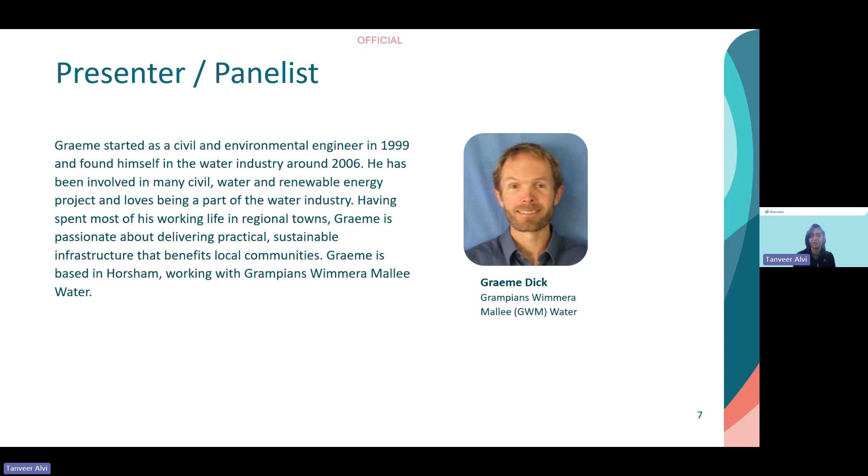We also have David Brennan from Wimmera Catchment Management Authority on the panel. He has led the organization for many years now and has been with the organization since its inception. So that's a long time. And he focuses on delivering practical outcomes that support both environmental health and regional prosperity.

The facilitator is Mika Pendergast. He's the incentives coordinator at Melbourne Water. He has been working in this industry for a long time, being with Melbourne Water since 2008, working on stormwater, sewage treatment, and water supply projects, and as IWM officer for City of Port Phillip and the Maribyrnong City Council on secondments. He specializes in stormwater management and water-sensitive urban design, and generously shares his expertise not only through industry conferences, but also by contributing to technical guidelines, for example, Melbourne Water's MUSIC guidelines. I think he's the best person to facilitate this panel here.

So thanks for joining us, all 3 of you. Now, without any further ado, we'll start with the presentation on the Horsham SmartWater Network project, and I'll hand over to Graeme now. Thanks, Tanveer. I will share my screen here.

Hopefully that's coming through. It's just not in the presentation mode. How about now? Yep, all good. Okay, cool. All right, now I'm in presentation mode. I can't see anything else, so please speak up if something's not going right.

But yeah, thanks everyone for coming. I'm just going to give a bit of a presentation on the project, which I guess is the case study for today's session. It's a bit of a mouthful, the title there, Horsham SmartWater Agriculture and Integrated Water Management Project. We refer to it as the Horsham SmartWater Project for short. And it was certainly a very collaborative effort between a number of agencies in and around Horsham, out in Western Victoria.

Thanks, Dave. Just for a bit of context around GWM Water, we're the water corporation in northwestern Victoria. We cover a large area shown on the little map there, water and wastewater services. What's a bit different from other water corporations in Victoria is that GWM Water manages water from source to tap. So we manage all the headworks, the dams in the Grampians, take some water from the Murray River as well, and groundwater, and supply and manage that all the way through to customer supply. So an end-to-end service. We don't have a lot of customers in the region, just given the dispersed nature of the population. So lots of small towns spread out over a large area.

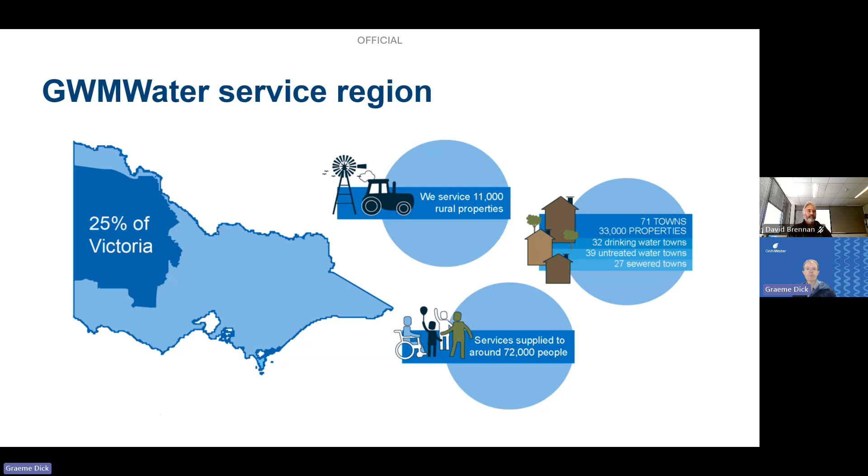So just a quick overview of the Horsham SmartWater Project. It was finished a couple of years ago. Ended up being an $11 million project, so reasonably substantial. The core aspect of it is recycled water treatment and distribution, but a strong integration with stormwater capture and reuse, which we'll go into a bit more. The nature of those different water sources and the setting of the town, Horsham, meant there was a number of agencies involved and some really strong collaboration between those agencies. Just to acknowledge, the project was funded through the National Water Grid, GWM Water, Agriculture Victoria, Horsham Rural City Council and DEECA all contributed funds to the project.

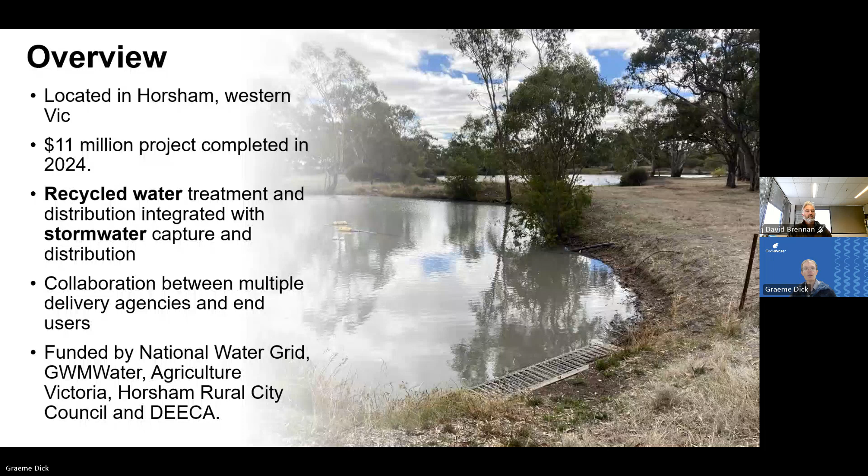Okay, so when the project started, there were a few issues going on in town. Number one, Agriculture Victoria has a research farm, the Horsham Smart Farm, just out to the west of Horsham. It's been the main user of recycled water from Horsham's Wastewater Treatment Plant for quite a long time. So the kind of cropping trials that they do there are set up around using that water. Over the years, though, they've improved their efficiency of irrigation, and especially recently, there's been a push for much greater diversification in the trials that they're doing, and looking to do more with less water. Overall, it's led to a reduction in demand for recycled water.

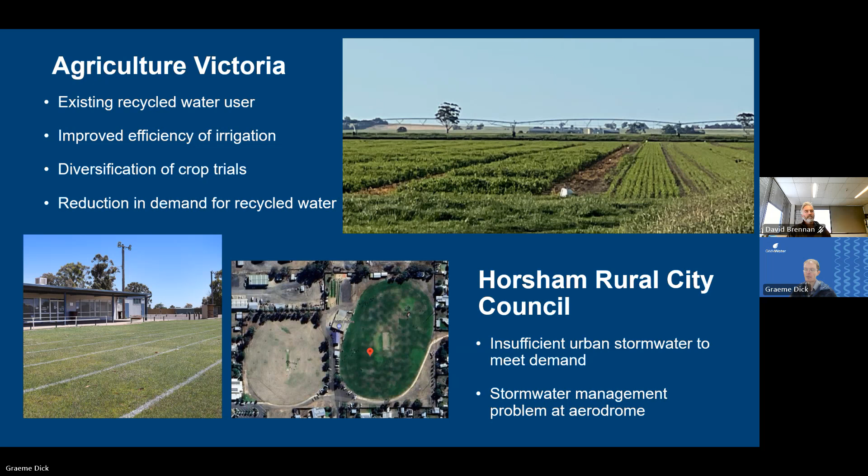Horsham Rural City Council uses stormwater that they capture around town in basins to keep parks and gardens and sports fields green. But they have an issue with that. It's quite a dry climate in Horsham, and most years they would be running out of stormwater to use on parks and gardens sometimes before summer's even halfway through, particularly before the end of summer. And using potable water as a substitute is not ideal. It's costly and not a good use of that resource. They also had a bit of a stormwater management problem out at the Horsham Aerodrome, which became part of this project, and we'll talk about that a bit later.

And for GWM Water, we had an issue linked to Agriculture Victoria taking less water for their smart farm operations. Horsham is growing slowly, and the volume of influent we get to the treatment plant is increasing. We didn't have a great breadth of ways to use that recycled water. There were flood irrigation bays on site, which were limited. Most of it went to Agriculture Victoria. And with them reducing their demands, we really were looking for something else to do with the water. And this project was about unlocking the potential of that water and getting some new end uses.

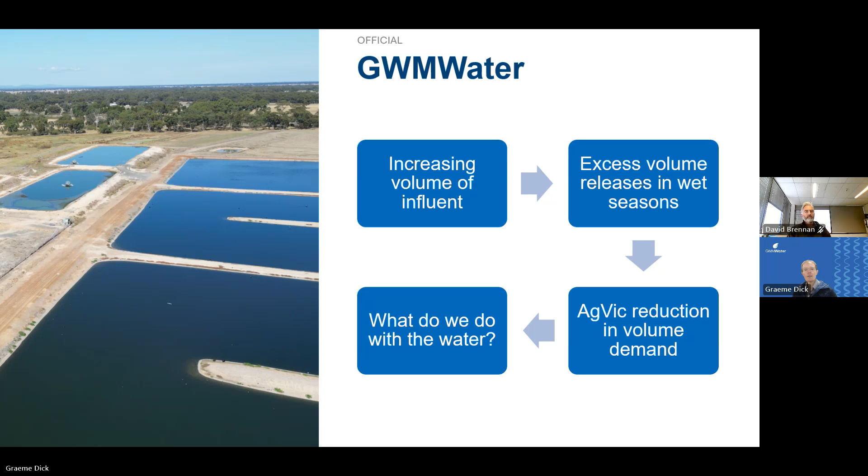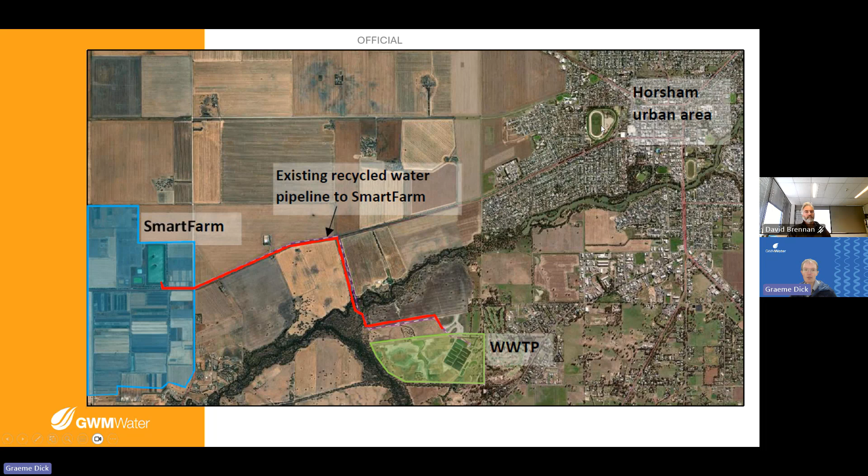So mainly at the outset, it was Agriculture Victoria and GWM Water got together talking about our recycled water agreement and their reduction in water being used and forecast further reduction. Agriculture Victoria also talked about how they'd been trying to get funding for building some better treatment infrastructure on site for that water, but hadn't been able to get that funding.

GWM, we knew we needed to do something to improve or increase the usage of that recycled water and give ourselves some more options. So we got together and put together a scope of works with the intent to try and get some funding for it, which involved GWM Water and Agriculture Victoria working together on building some infrastructure and, I guess, creating a more sustainable way of using the recycled water.

A key part of that was also involving Horsham Rural City in getting recycled water into town to the parks and gardens to supplement their irrigation so that those green spaces could be kept green year round, and be of more benefit to the town, give more options for recycled water to be used.

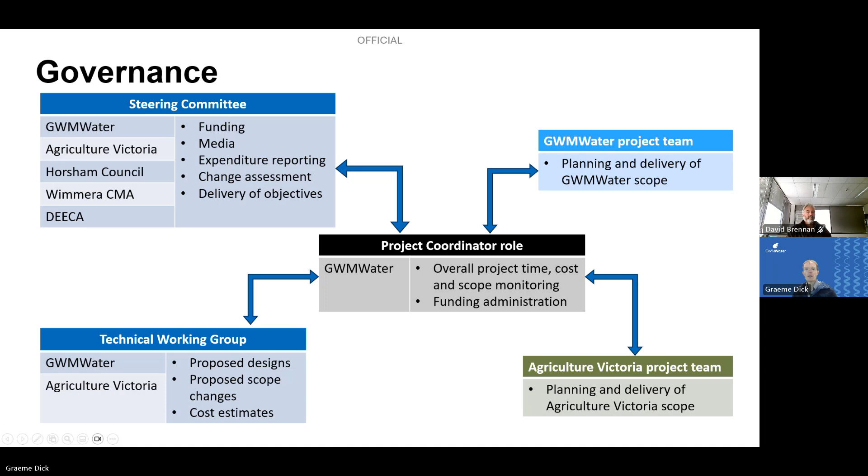And then the actual delivery of the infrastructure and the items to deliver the outcomes we wanted were done separately. So Agriculture Victoria worked on their infrastructure on the Horsham Research Farm, and GWM Water, we worked on the infrastructure for our wastewater treatment plant and the pipelines around town. We can dig more into that later when we have some more discussion.

But essentially the scope of works for the project, we had a new treatment facility to go in at the Horsham Wastewater Treatment Plant. So it's a DAF, a dissolved air flotation installation. So that was going to remove a lot of the solids from the recycled water and make it, I guess, more suitable for irrigation, particularly in mechanical irrigation systems. And we were building transfer pipelines to move the recycled water into town to use it in the green spaces in town.

Agriculture Victoria, they built a reverse osmosis plant at the Horsham Smart Farm. So it's a desalination plant essentially to reduce the salt in that water, and they actually used it to create a range of salt levels so that they could run crop trials with different salt levels. So really interesting what they're doing with that kind of shandying water to get to salt levels at their will, I guess. Yeah. And they also did a very major upgrade to their irrigation system, which was getting a bit long in the tooth.

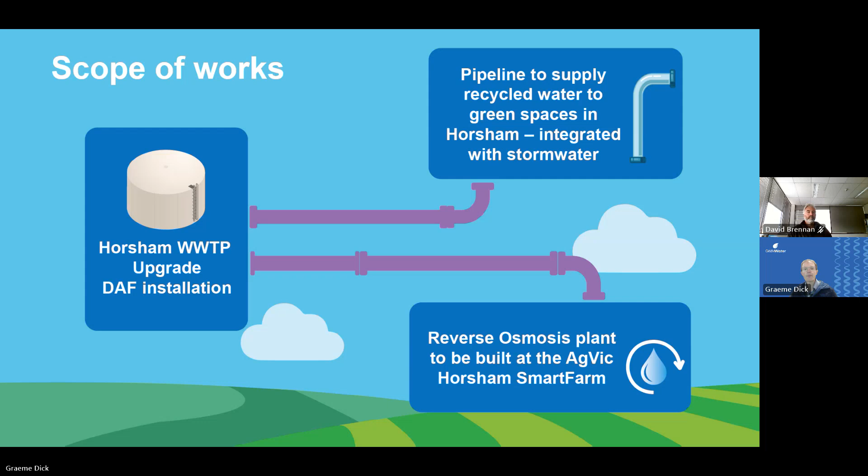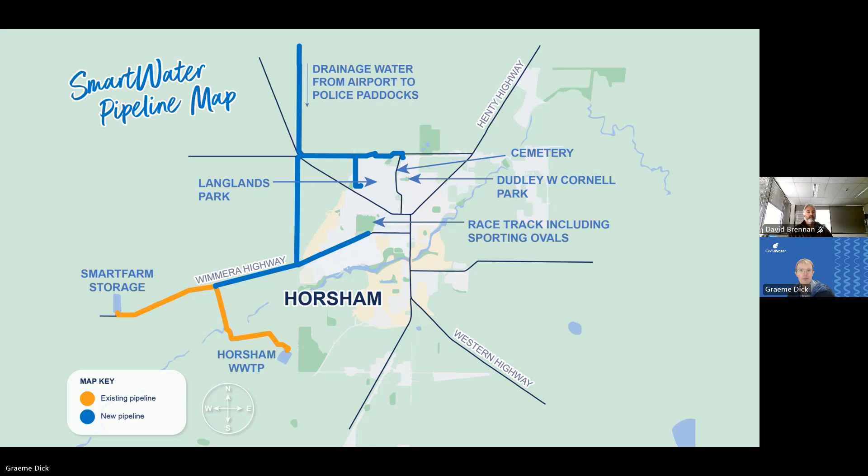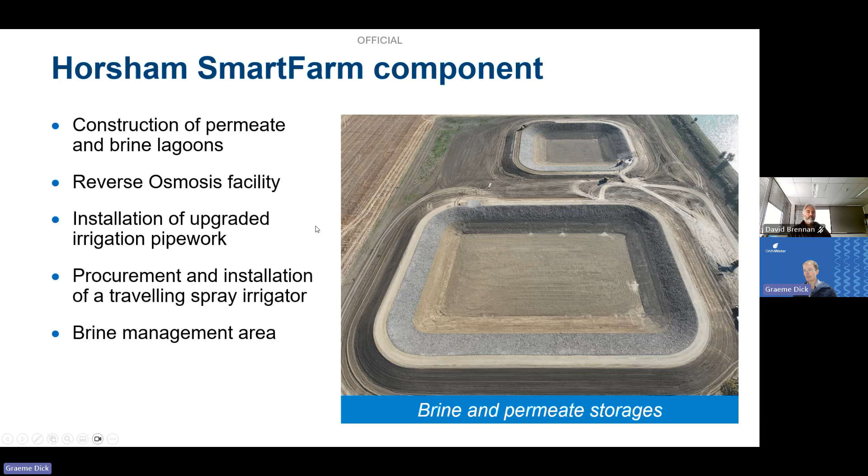A lot of work, so they replaced all of their flood irrigation system and got some new systems for travelling mechanical irrigation, and then had to do work on a brine management area. Of course, when you have reverse osmosis, you create a brine byproduct. So they had some innovative systems they used to manage that brine.

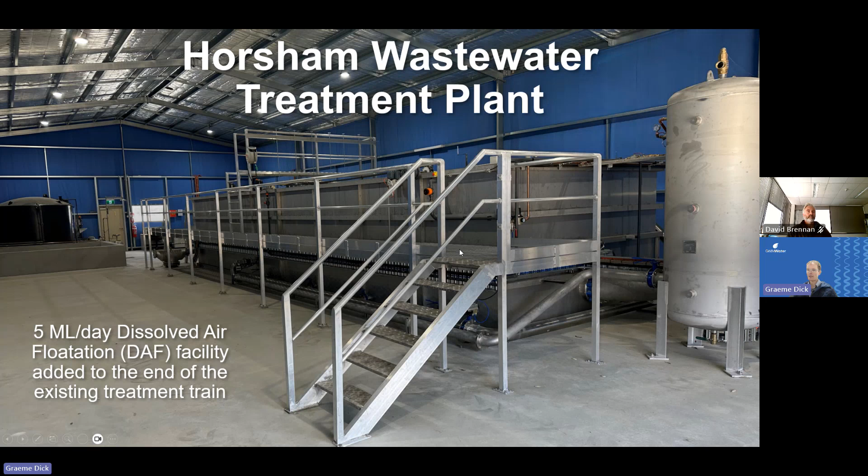At the wastewater treatment plant in Horsham, GWM Water built the new dissolved air flotation facility. So this is the tank here. In a new shed there is also provision to add a second train to that DAF to future-proof that treatment facility. It's fairly low-tech, really, a pretty resilient sort of treatment system, but it certainly removes a lot of solids from that water.

And then the pipeline, which was installed around town. By skirting around the edge of town, we were able to install most of that pipeline on roadsides in non-residential areas. All around that edge of Horsham, it's mostly cropping paddocks at the moment. And then from the edge of town, we were able to duck in along residential streets with shorter lengths of pipeline to get to that list of end users.

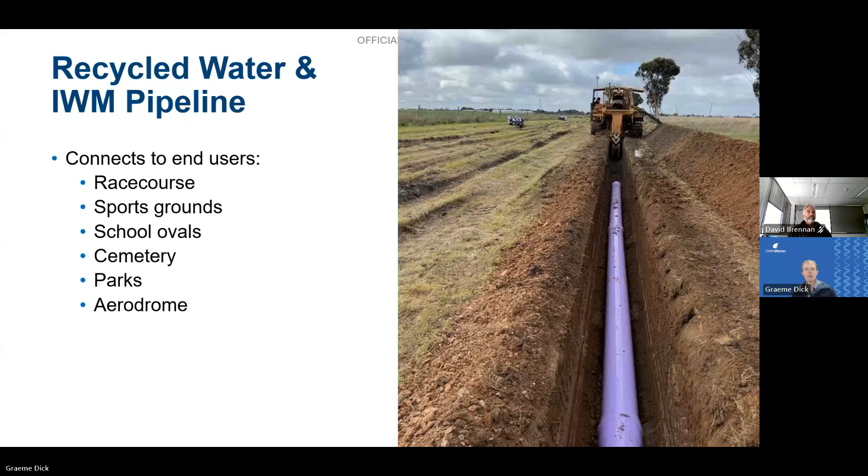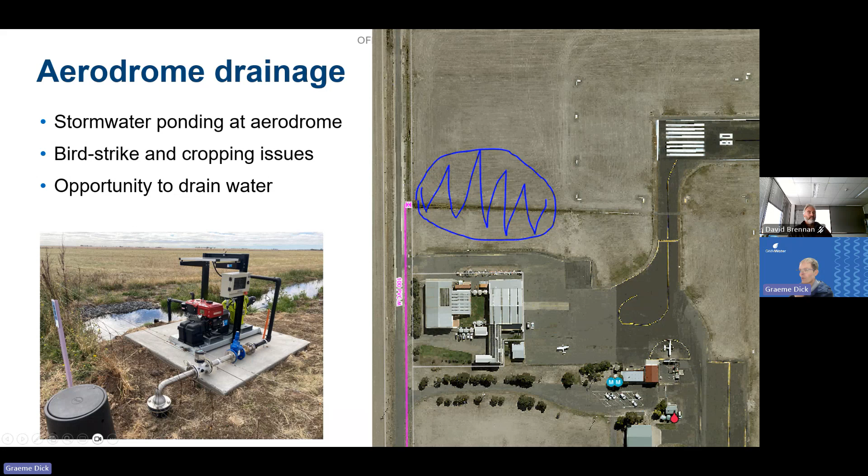What this project actually did was build a pipe out to that site and then install a sump with a pump, so that we were able to pump that water away. And we did that by using the recycled water pipeline we'd installed as a stormwater transfer pipeline as well. So we'd alternate from recycled water to stormwater using the same pipe. There's a whole process around how that gets isolated and flushed to make sure the recycled water is out before we put stormwater in, so we're not cross-contaminating.

But that was devised as an efficient way to use an existing pipe, because most of the time when we wanted to get rid of that stormwater from the aerodrome, there wasn't a call for recycled water to be used.

So over winter, when parks and gardens aren't really using recycled water very much, that's when we're most likely to have water ponding at the aerodrome, and we can use that pipeline to get rid of that water. And that water, when I say get rid of it, we move it to the stormwater detention ponds that are already existing in town. So then that can be used for irrigating parks and gardens as well.

So I guess that added to the pool of water that was available. And the operation of that pipeline has been an ongoing collaboration between GWM Water and Council. And it's just one of those things which is a hallmark of an ongoing benefit for both organisations.

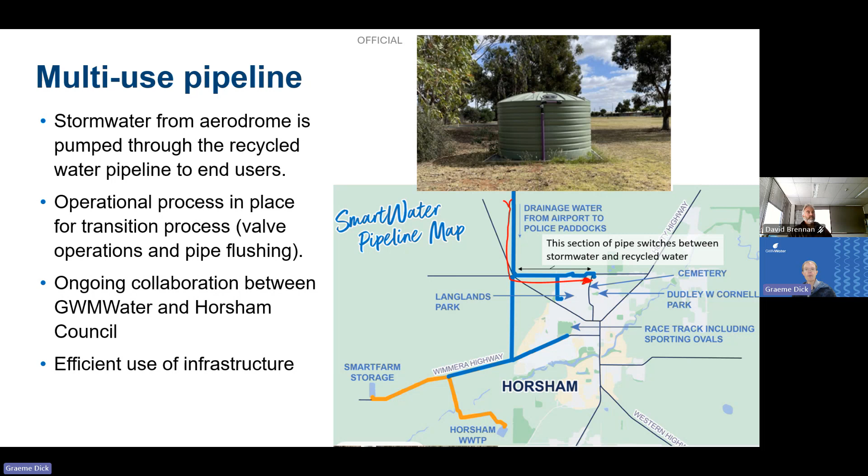I guess most of you are probably familiar with the benefits of these sort of solutions, in that for Agriculture Victoria particularly, there's an economic benefit, in that they're able to attract more businesses to undertake their crop trials. A lot of social benefits by keeping green spaces in town green. Horsham has had heavy water restrictions in the past, and it's certainly a happier place to be in when things are green, rather than all dead.

And environmental benefits of reducing that potable water use, maximising the use of what we have in stormwater, and then the long-term solution in having a more sustainable and reliable water supply for the town. Making the most of the resources we have is important. And plenty of opportunities for future expansion.

So at the moment, there's plans ahead for expanding that recycled water network in town, further integration with stormwater supplies, and potentially increasing water quality as well to diversify the uses that water can be used for. I think that's all I had. So that was really a bit of an overview, but hopefully that will give you enough context for questions later on.